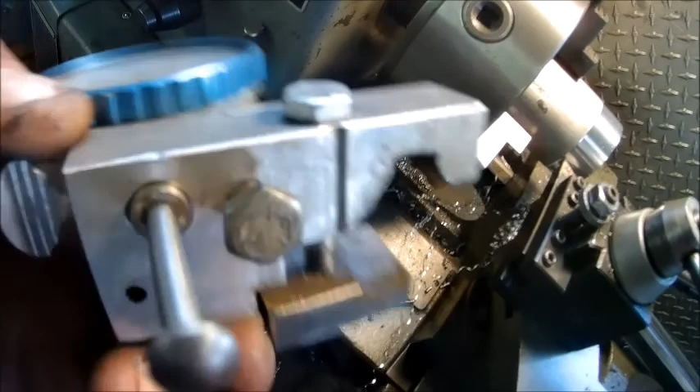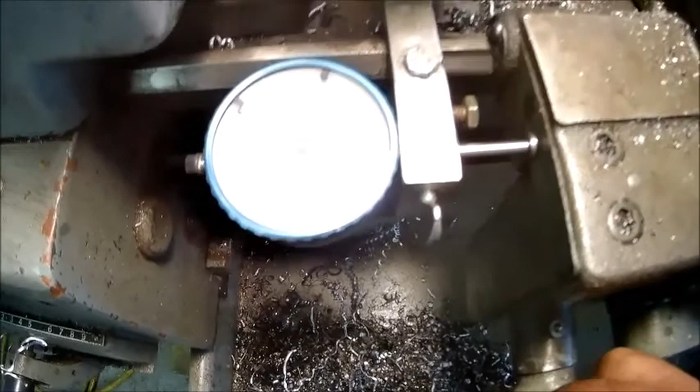Okay, we made a puller to pull these because they were two different sizes. We had to make a thicker set to pull it off. But now we got to modify the installer tool, which is basically this, and this sticks out of the engine block, this part, so that fits in there, and then a couple studs, and you push it in. But the problem is...

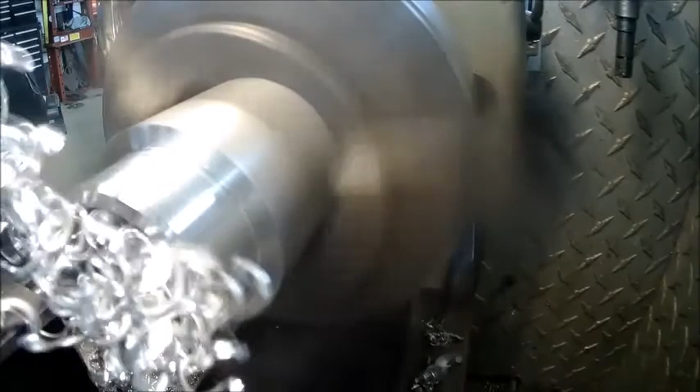This other style fits in there too loose. So basically we're just going to make a bushing that you'd slide in there and then slide this one in, and everything would line up closer than just having this floating around. We'll make it out of this piece of aluminum chunk we got laying around. We'll see how many it takes to make the right one, if we could do it in one try, or if we run out of material. Stay tuned.

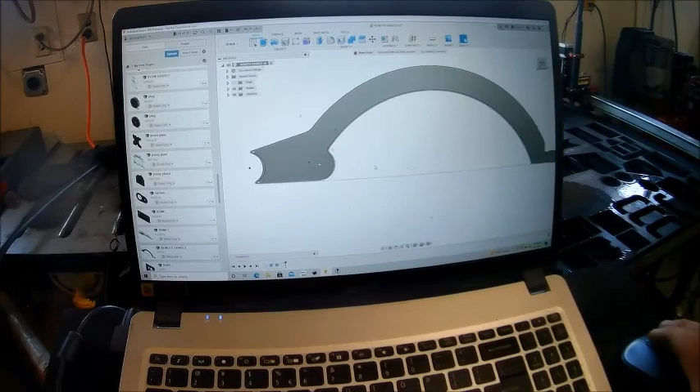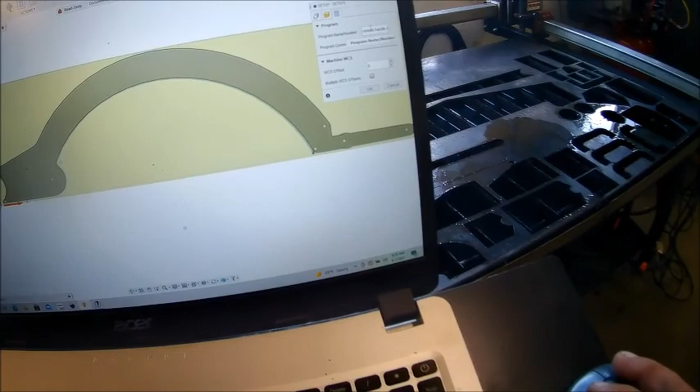I'll use this as a stop set up here that clamps onto the rail. Basically come up, stop on 0. That's going to be basically the bottom of our bore.

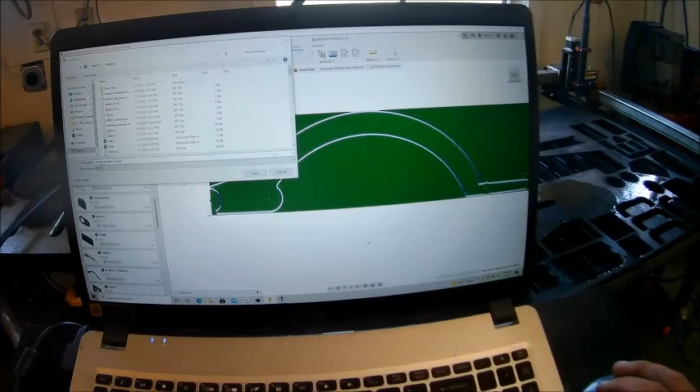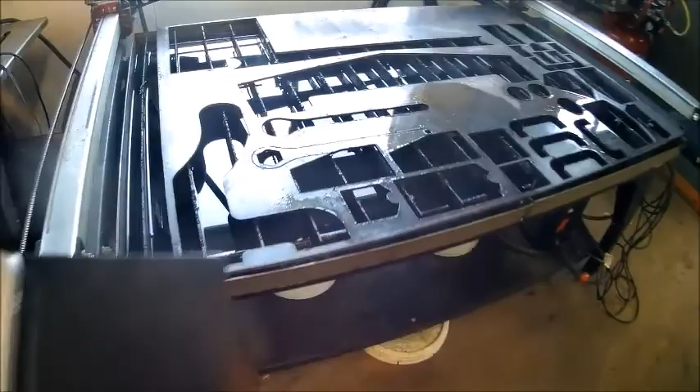Made for our oil pump deal installer. There's the old one. Here's a new one. So when you use a new style, you use the bushing and then center that up, I guess. Hopefully it'll be the right one.

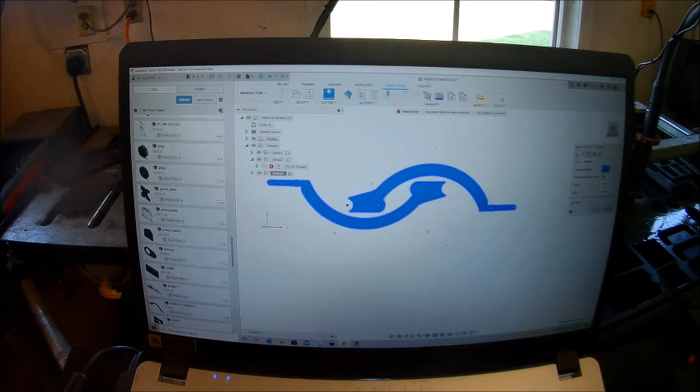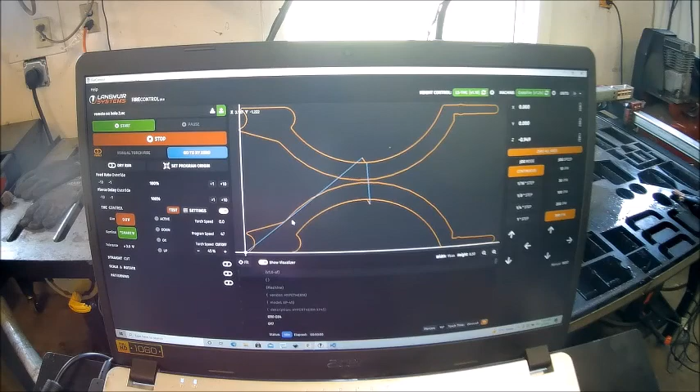See if BREHM CORP got back with us. No, we got no messages from BREHM CORP. I text him, he's got a phone in his pocket like all the time. It should have a little thingamahoocher right there, as far as I know. Not there. There. Once again, waiting on BREHM CORP.

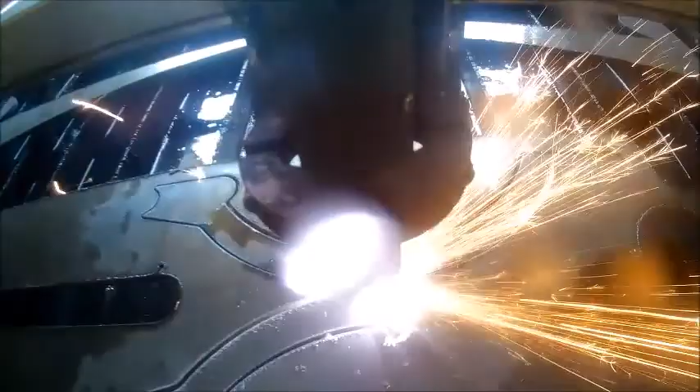Okay, we're going to make a couple remote handles for BREHM CORP. He never did come up with any material, but he heard me telling a story I had, was cutting some 1/4 inch. So voila, we come back with this project.

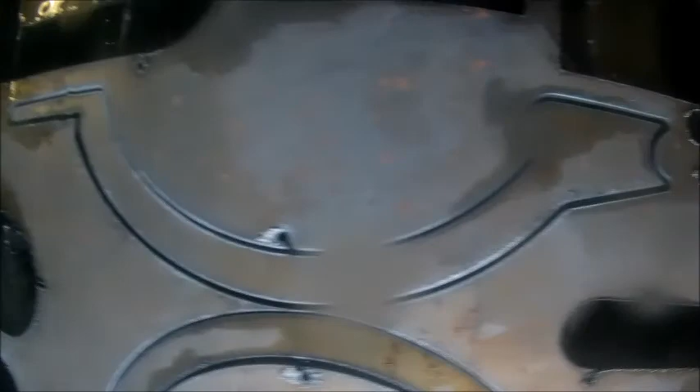This time we have to omit the pinhole for the cable. So that's easily done by just picking that and hit delete. Okay, and delete it, it's gone. Then you flip back over to your manufacture, create a new setup.

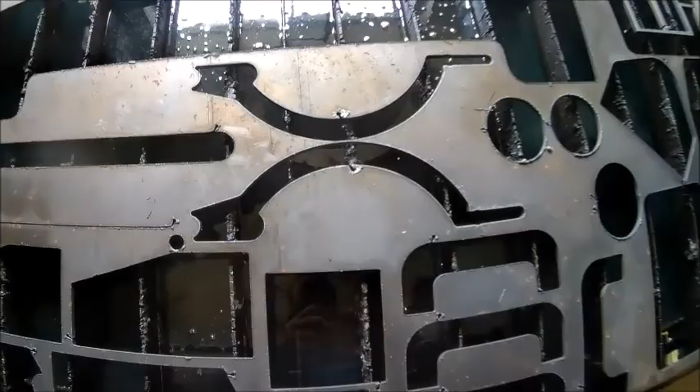And we're going to, yeah, we got this all set up. Got a new handle, remote handle without the pin. And we'll make a new cam profile.

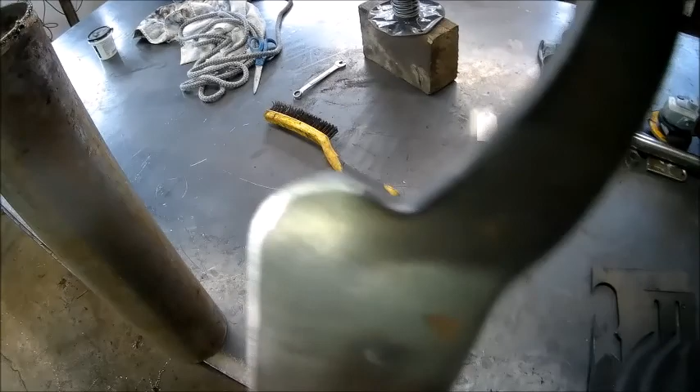I just heard a ding. I think BREHM Corp just called us back just in nick of time. That little turkey. Two is the answer. Good, that's all you were getting anyhow. Okay, 2 it is.

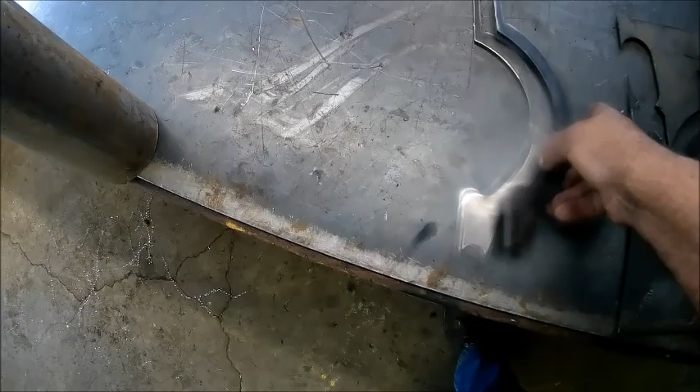I'll simulate that just to see how it looks. Looks like it'll cut it out. Post G-code. Yeah, we already named it.

There we are. Get rid of that. Go back over to here. Load in our program. Okay, now we just got to set up where we're going to start on a plate here. It's got a pretty big spot so we can make work.

Okay, since this is BREHM Corp and we ain't got a lot of material, we need 2 pieces, so we kind of nested them together to save some material. So we're going to have to make a new program for that.

Okay, and then set up a new profile. And we got to make sure we got a 1/4 inch plate, which we do. We got to tell it what we want to cut. We want to cut that and that.

Always make sure that's in computer. Lead ins, lead outs. We'll get rid of a lead out. We'll simulate it. That should be what he wants.